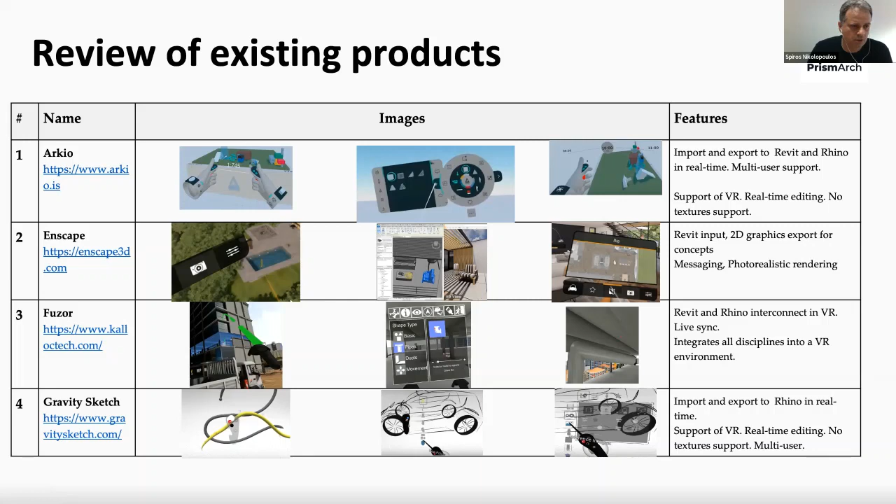Also, there have been major efforts by, let's say, the major players in the field, like NVIDIA and Autodesk, and Twinmotion by Unreal itself. All of them do provide some kind of immersiveness, and sometimes they can also link with existing software tools.

PrismArch was there to cover more in terms of being able to support different versions, being able to log everything, being able to, apart from a design tool, also be a knowledge management tool that can help people do their work, and also unite them, so break these silos of interdisciplinarity.

And this is the very high level concept of PrismArch. So essentially, three different disciplines were engaged: architects, structural engineers, and mechanical and plumbing engineers. They all use different kinds of software. Our goal was to build something that will be in VR, but also will be able to interconnect with these tools, and then end up with a collaborative VR space where all of them can work together.

And for this purpose, we have relied on Unreal for immersiveness. It's one of the two engines that can support VR technologies. Speckle has been very fundamental in our developments. I will talk more about Speckle. It's an open source software that has been put out there to serve exactly this purpose, to facilitate the interoperability between different software tools in the domain of AEC, of architecture, engineering, construction.

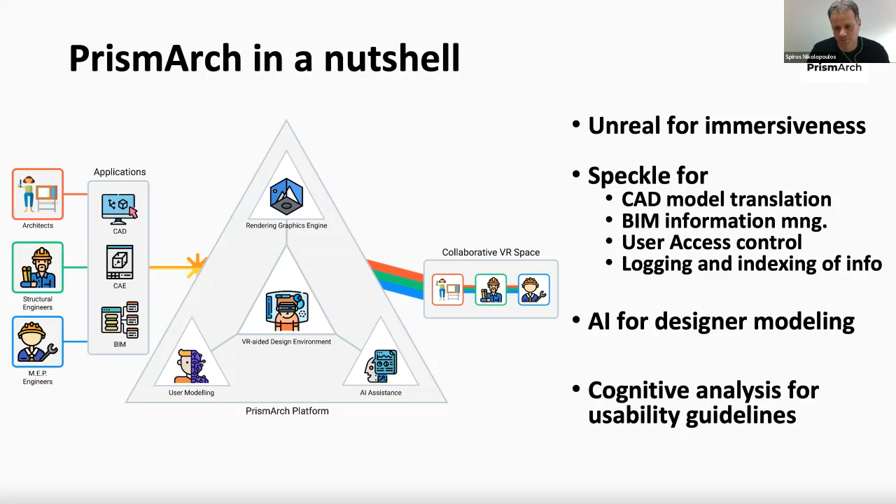And this is a little bit of an overview of what we have accomplished, if we can take it in three major pillars. First, we had to ensure the interconnection between all different software types, and be able to connect Unreal with Rhino, with Revit, and SAP. This has been one major undertaking that we have done.

The second has been to build this collaboration space. So how do we have co-presence of users in an environment where they can bring their material, images, PDFs, 3D models, bring also the models that they have been working on for the construction, interact with them in novel and insightful ways, and discuss them and interconnect.

And then with the experience space, this is the added value of when you go in VR. As I said in the beginning, the idea was to facilitate people having a direct understanding of what their design choices is. So at a high level, they discuss here on this table, make some design choices, add things into their current project, and can immediately go into what we call a physical scale or a one-to-one scale and see the impact of their choices.

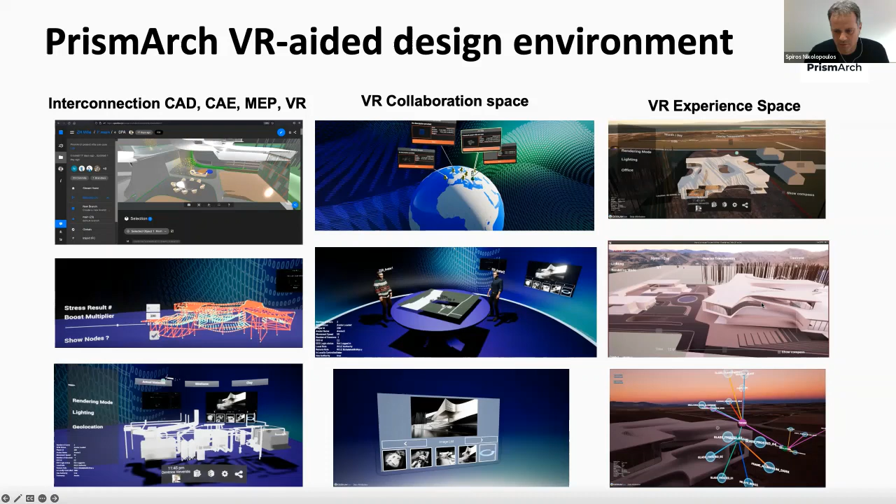So the main accomplishments I'll take you through in this presentation: the interconnection architecture we have adopted to achieve interconnection between different software tools, the Speckle Connectors, which I'll explain a bit, to support a certain piece of software. We'll also talk about semantics and digital tags, relating to the fact that apart from being a visualization and design tool, this should also be a knowledge management tool where we can easily search and interrogate things, retrieve and inform about it. So it's no longer just a simple model viewer, it should be something like a knowledge management system. And I'll close up with interfaces for intuitive interaction, taking you through screenshots that give a better idea of how the current prototype looks and what it can support.

So about the interconnection architecture, we started by looking at the state of the art and what options were available. For exchanging information between different software packages, there's already the option of file transfer. That's not the best, but although it's the practice now in many cases, it's by far the most straightforward approach.

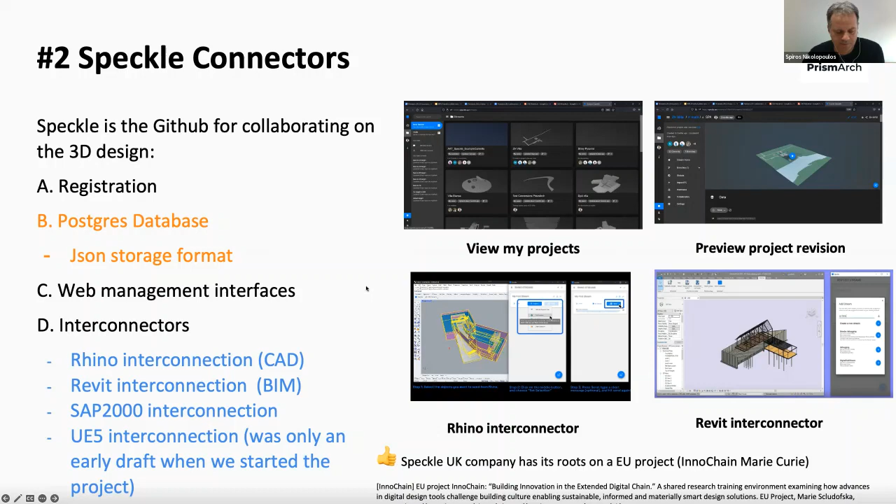To give you a bit more understanding of how this works, this is for CAD interconnection. Usually most people rely on Rhino 3D to receive new designs for editing, and the cycle goes like this.

You push things to the Speckle database and receive from the Speckle database, and since they're in Speckle, they can also be viewed in the Unreal environment, and then pushed back to Speckle after making changes in the Unreal environment, the VR environment, so they can go back to Rhino for more elaborate or detailed work.

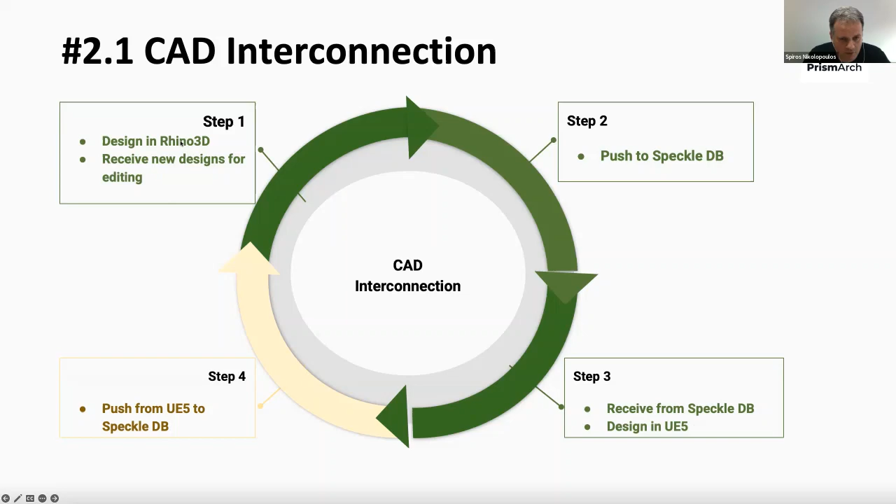And this has been the case for many different software tools. When we started, things were not mature enough, so we had to contribute a lot to the Speckle community. Some things were already there, like going from Rhino to Speckle and vice versa, but the connector that had to do with connecting Speckle with Unreal was not there, and has been one of our important undertakings to contribute to the development of this connector.

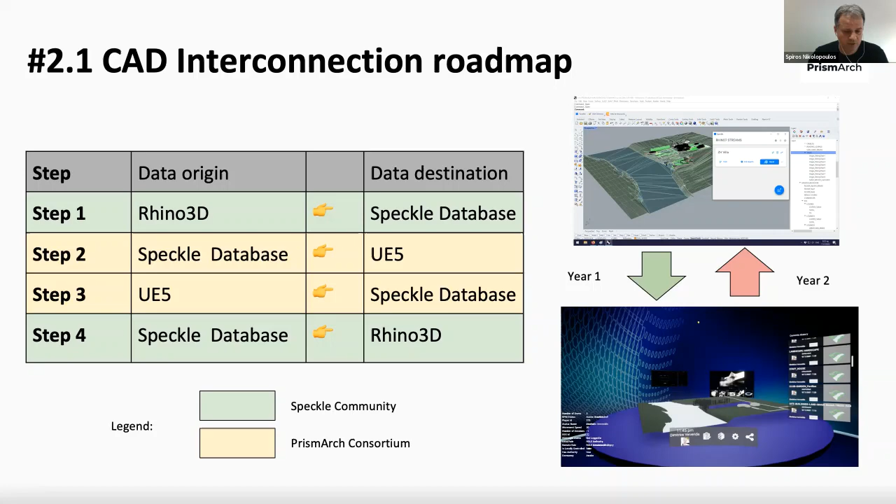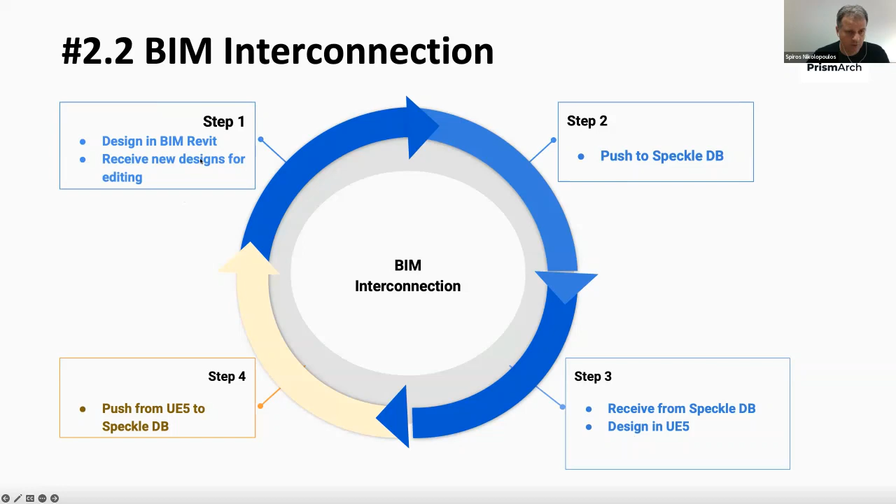Again, this is the case from Revit, I won't repeat myself. The idea is: from Revit software, push to Speckle, receive things in the Unreal environment, and then push them back to the Speckle database so they become available for editing in Revit again. Here our main contribution was developing the connector for Unreal to be able to handle all the imports coming from Revit.

And you can understand that this is not straightforward, because apart from the geometries themselves, there is a number of metadata associated with each object. This should also be handled in some sense by the connectors. So we should be able to map all the metadata schema used by Revit to the metadata schema used by Speckle, and be sure that in your Unreal connector, you are able to read that schema and use that metadata.

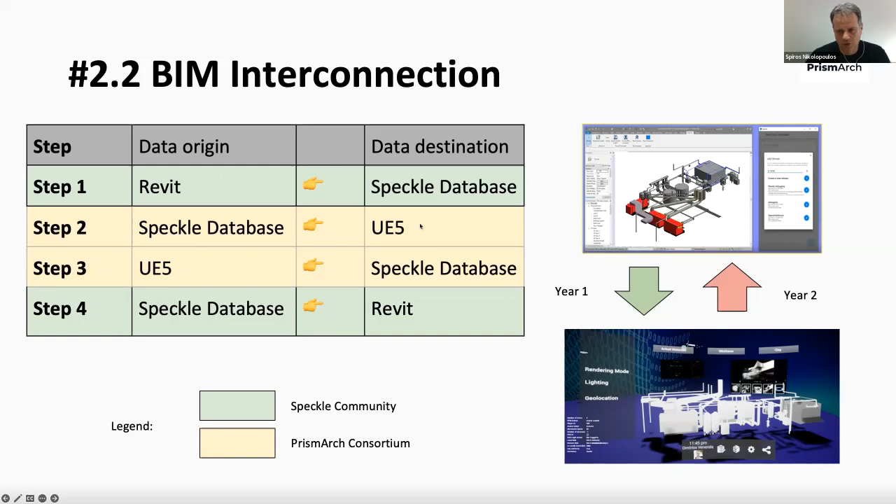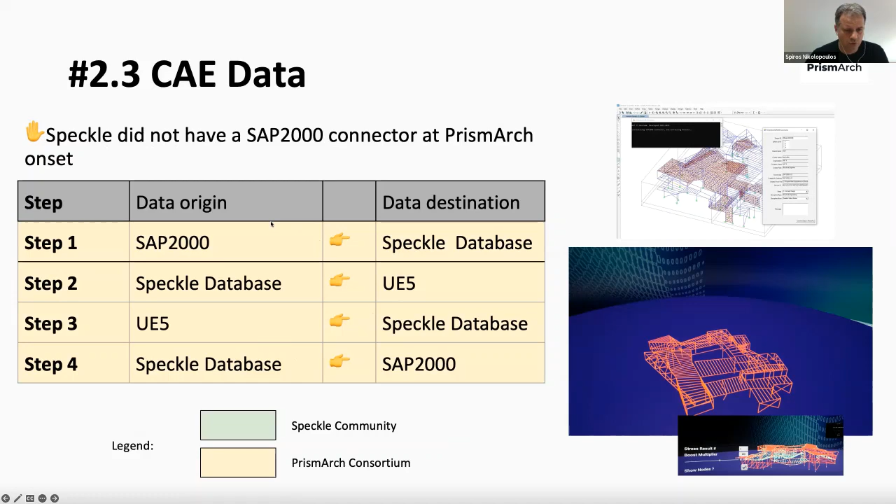And finally, again, this is the CAE interconnection, for SAP 2000, another piece of software being used by the structural engineer. Again, the cycle is the same. The only difference here was that, apart from the Unreal connector we developed, this was not elaborated when we initially started our project, so our consortium also had to work on the connector from SAP to Speckle.

So that's to give you an idea of the connectors and the underlying software tools, the underlying technological modules that support the interoperability.

The next accomplishment had to do with semantics and digital tags. As I mentioned, PrismArch was more than a model viewer; it should be a knowledge management system. Speckle was not entirely designed for this. Speckle was designed to be like the GitHub for exchanging models, using branches and so on. But we had to build a layer of knowledge on top of this to support complex queries, like what had happened to the object, or give me all the project versions associated with this object, or who was the user that changed the version of an object.

For this, we relied on semantic technologies. Starting from the Speckle database and the GraphQL interface it inherently supports, we went into a semantic representation and storage REST API. So, based on an ontology that relies on building information modeling, we built this knowledge base, a knowledge layer that sits on top of Speckle, incorporating all the information already in Speckle, but offering a much more powerful API for retrieving information, apart from the GraphQL query API offered by Speckle.

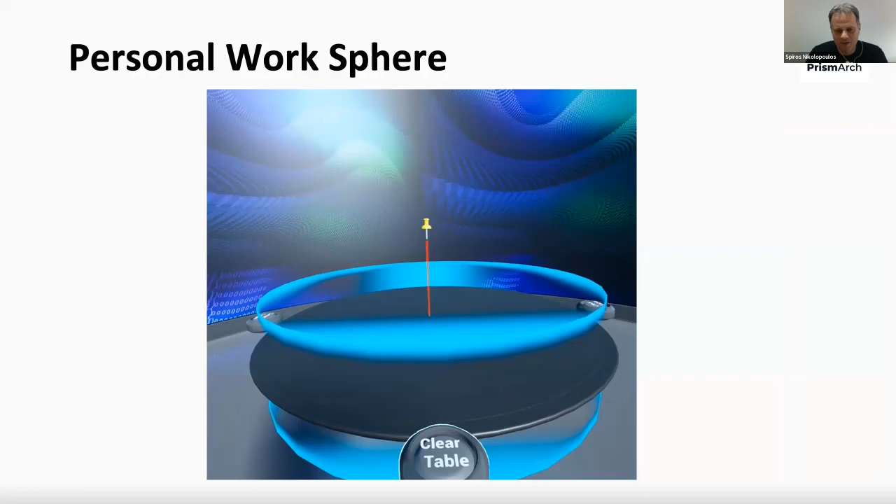And then we have the collective workspace; this is where you share your material and you invite people to discuss and collaborate with you. So this is the personal work sphere, and we have a main working table where things will eventually come, and I will explain to you how.

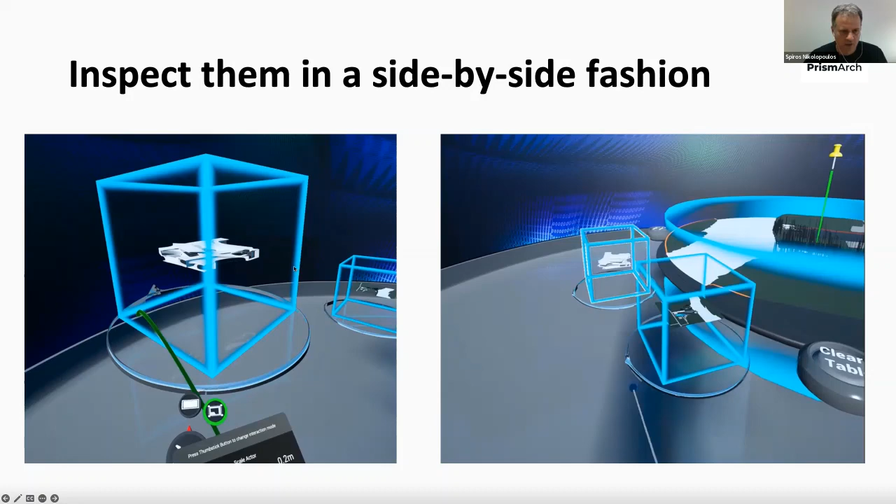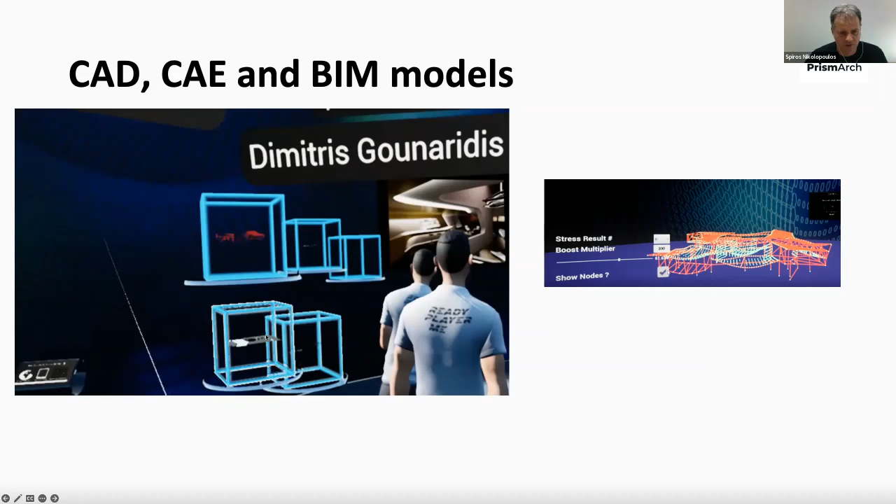And it's also important to say here that this multi-tool is able to load the models from different disciplines. Given that we have developed the connectors that I talked about earlier, the Unreal connector is able to process the information that comes from Rhino, from Revit, and from SAP. You can see here that this model is very different from the other models. Still, they are able to accommodate it.

Now, apart from inspecting them side by side, it's also deemed important to be able to snap them or pin them on the main working table. So there is an option to pin this, and it is automatically transferred onto the main table, in the proper size and dimensions, and, let's say, the registration. It is important to be able to do this because essentially you want to discuss how things incrementally build on each other, and you want to discuss changes and so on.

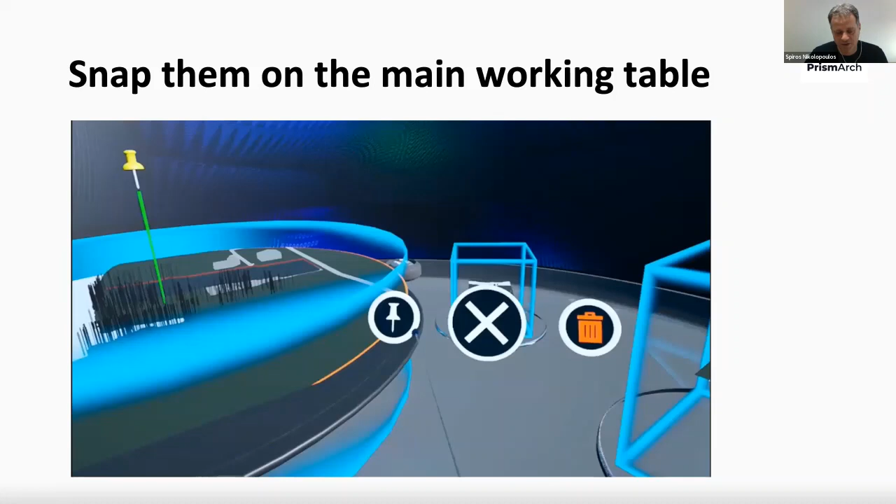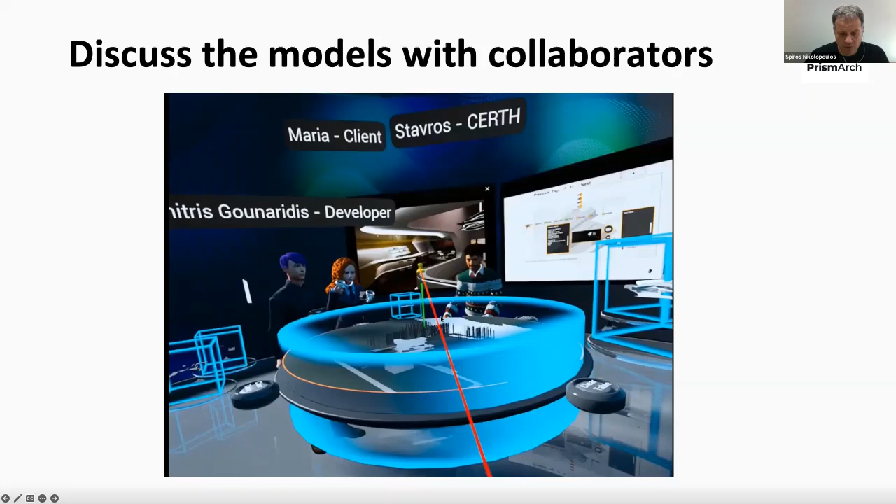And when you have set the scene for people to join, then you can invite your collaborators, and then you reach this kind of environment. This is, let's say, the more vivid picture of what we can offer. You can see here that people are collocated in the same VR environment. They can interact with all the material. They can talk to each other, of course, using directed voice, and they can have a really good discussion of what they need, what is missing, what should be changed, and so on.

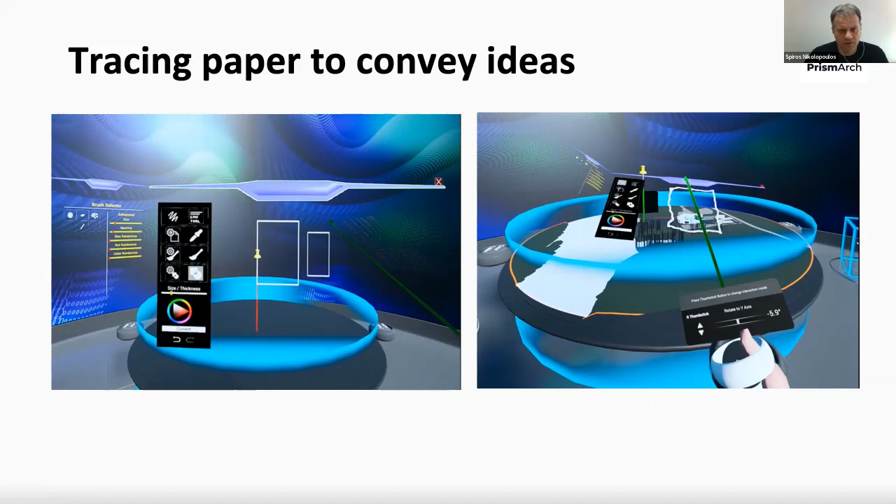Before we go into this, we have also made a number of auxiliary tools that are very typical in the domain of AEC, of architecture. One of them is the tracing paper that allows you, in VR, to have a transparent view of what is underneath, and you can draw with the tools to convey your ideas or some temporary sketches. This is the tracing paper tool, and this is the clipping plane tool.

So when you have models like this, you should be able to see inside them, or see when walls disappear. This is also a very basic functionality that was requested, and the clipping plane has been implemented in many different ways. This can be a cube that is transparent and is able to cut the walls. It can also have a different shape if you like. And clipping also takes place in these cubes. So there are many different places where the clipping could take place.

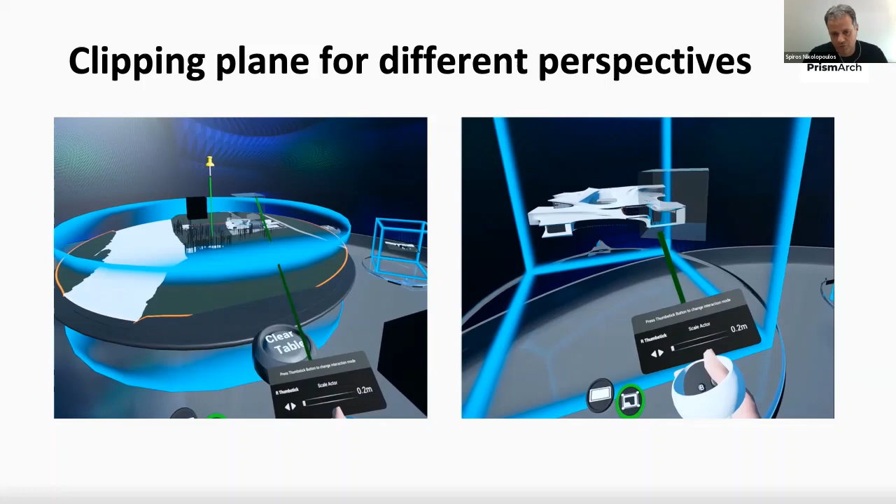And of course, one other thing that I want to mention is that each and every one of these objects here can be manipulated. So there are different modes. We can change their scale, their rotation, and the distance. All this can be manipulated so they are placed in the proper position inside this room to be further investigated.

And another thing that we can support, as I said, is the design object. So apart from being able to load things from Speckle, you should be able to design some primitive geometries yourself. And a number of things have been supported, like doing some primitive stuff, like some squares or some cylinders.

But we have also worked on some more advanced creation tools like Bezier and spline tools, where you can define a number of spots, and then you can extrude these to become a very arbitrary shape that you can use in your drawings and in, let's say, the discussion about the model. These are a little bit more difficult to handle, but still most of the people working in this domain are familiar with using them.

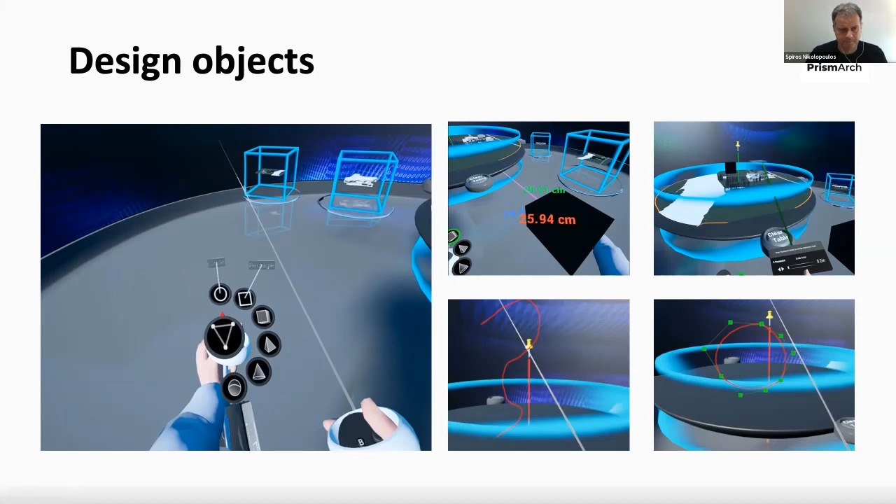And another thing is that we should be able to leave comments. As we said, it's about collaboration. It's about being able to discuss things and give tasks, take tasks, and so on. So another thing has to do with commenting. You can leave a comment in space, in a certain, let's say, geo position inside the model, or you can leave a comment associated with an object. And maybe here you can also add the name of the user whose attention would be needed.

It's also an important thing because you can imagine that you maybe discuss something and maybe the involved person is not here, so you should be able to leave a comment and in a sense assign a task to him or her, so she can later on join and deal with this task.

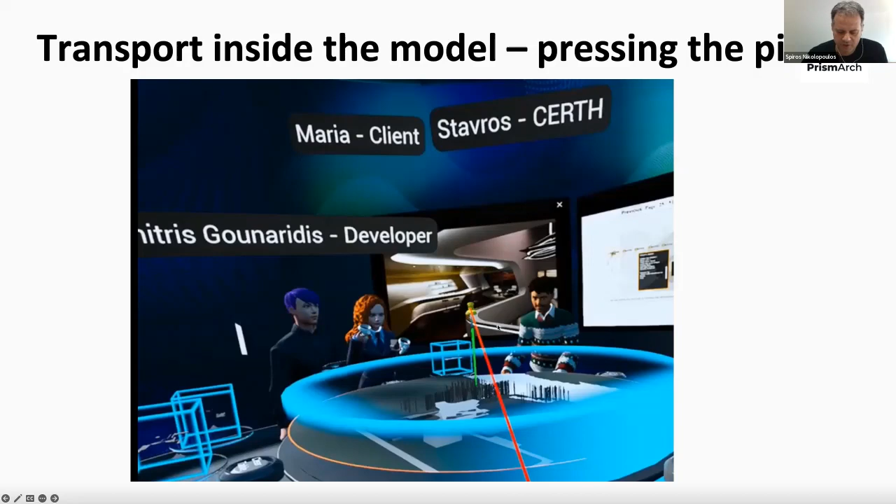And then after being in this collaboration space and facilitating a number of discussions or a number of actions, you can actually move inside the model. And here in the interface we have this pin and a laser. You can move this pin over what is lying on the main table and identify the place that you want to be transported to. And by pressing the pin, you go inside the model.

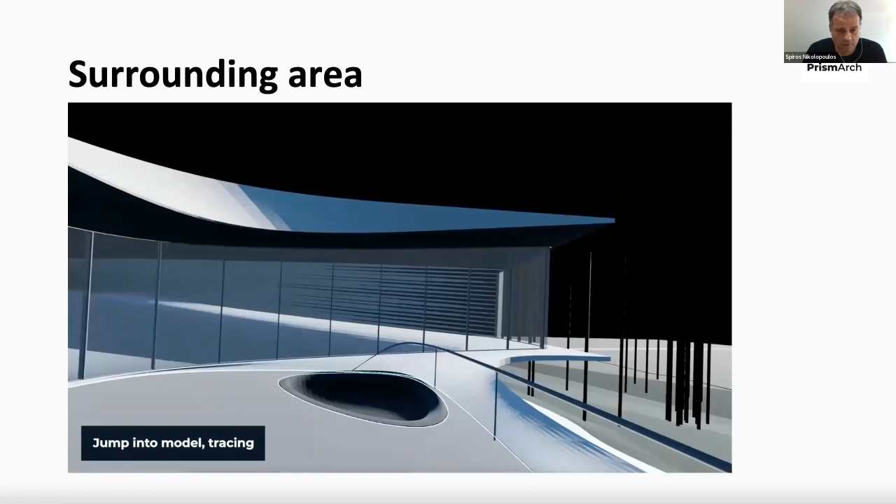So you can see that now you are in one-to-one scale with respect to what you have been previously considering as a CAD view. This is the surrounding area, but you can also go inside and see certain stuff. And of course, all the different tools also apply here.

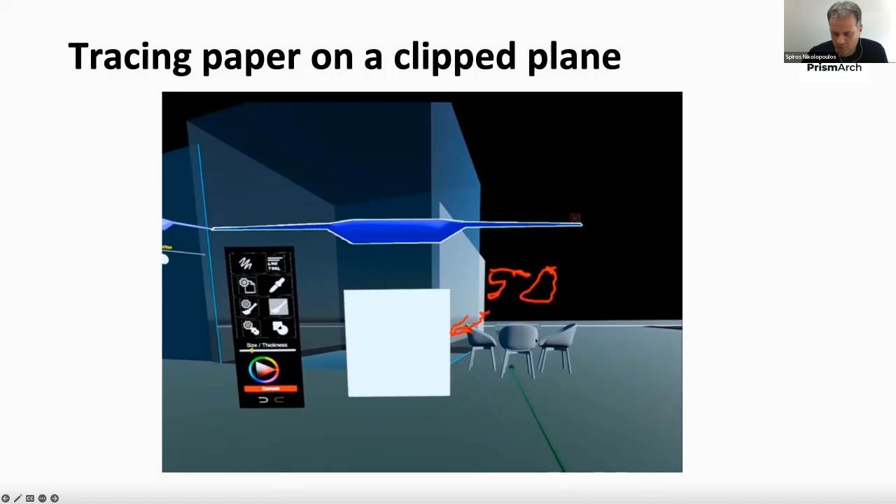So here is the tracing paper where you can actually do the same stuff. Here is a combination of the tracing paper and the clipping plane. So you clip this wall, and then you can draw your idea of what could be used inside this building, or use some 3D object to place it.

And of course, we are also trying to make best use, we are still in the process, of what can be offered by the VR technologies. One of them is lighting. So you can easily manipulate the lighting and see how the shadow of this building will be, depending on the time of the day, the day of the month, or even the month of the year.

These are all things that become very easy when you are in the VR space, and fall into what we call simulation. So when you make a design choice, when you decide to put a window, to come to this very simplistic example, you want to see when the sun would come in, and this can give you a lot of flexibility to see how this will feel.

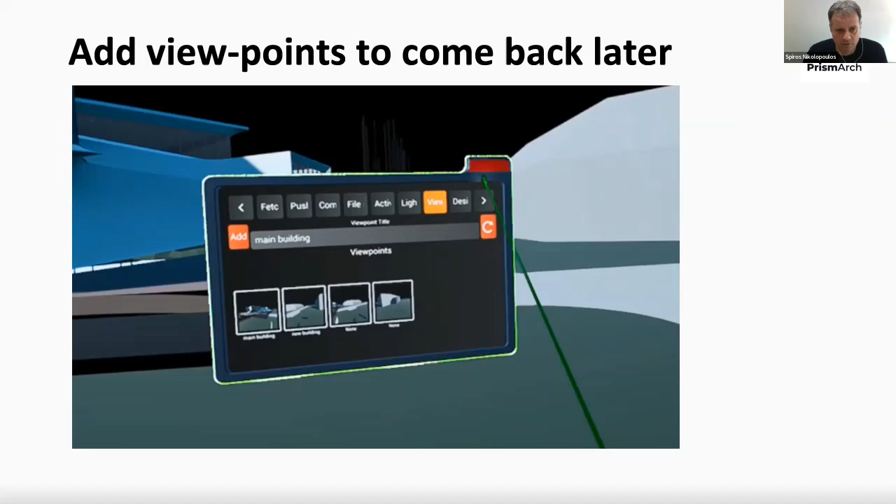And some other functionalities that we have done, like adding viewpoints. Essentially these are bookmarks inside the physical space that you consider important, so you can later on visit them as you go along. Loading 3D objects inside the physical space and placing them is also important.

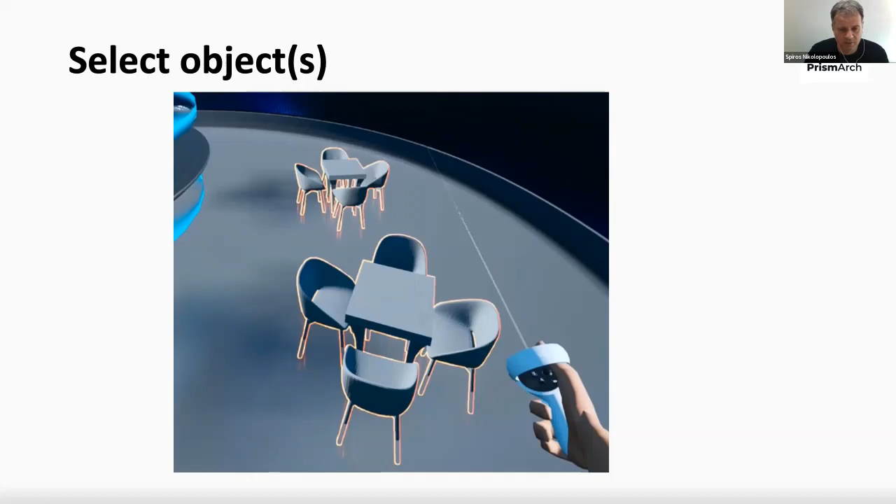And apart from that, these again are at the level of model viewer, discussing and so on, but at some point you need to be able to commit back what you have done. First you need a way to select objects, like multiple objects, and then we have added this functionality of committing things back to Speckle. So everything that has been designed in Unreal, together with what was already there, can be committed to Speckle.

One important thing was to be able to add tags. So when you make a new object or when you load an object, you need to be able to tag it, or you can select multiple objects to give them a tag and group them in a sense by tagging them, and commit them back to Speckle. And here is the commit to Speckle, so to the central database.

And what is very interesting, just coming back to where we started. As you remember, it was probably Rhino or Revit that initially committed the models that we have been inspecting inside the Unreal mode. And now we have been in Unreal mode, we have discussed in the VR space, we have seen the impact of our decisions. We have come to a conclusion.

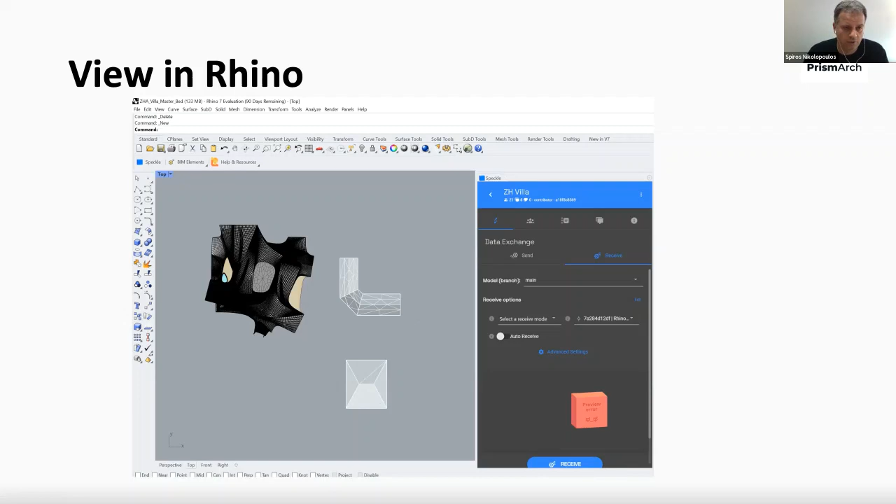We have committed back the changes, and these are again visible in Rhino. This is a building that was created in Unreal and has been committed back to Speckle. This is how the interface of the Speckle connector for Rhino looks. We have been able to receive this and see it in Rhino, so here you can do all the necessary changes or inspections through such a tool. And this is also the case for Revit.

And that will conclude my presentation, and I hope I have given you a very good understanding of how this would look.